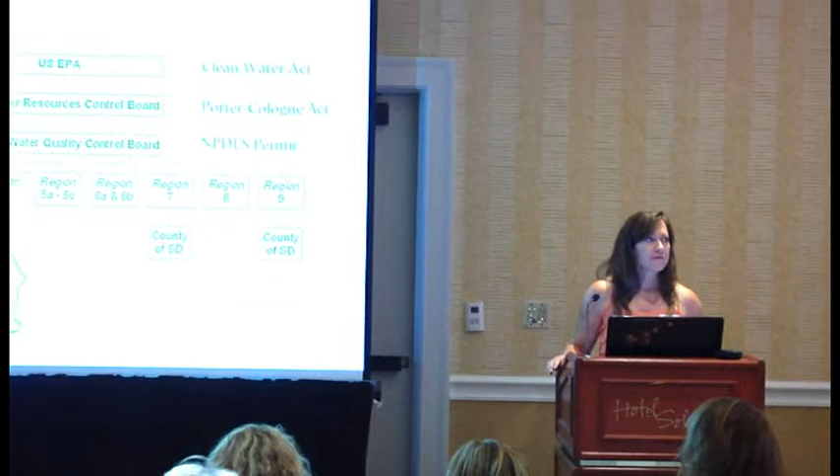From the regulatory side, it all starts at the federal level with the US EPA and the Clean Water Act. Section 402 of the Clean Water Act requires that permittees or co-permittees have a municipal NPDES permit, that's National Pollutant Discharge Elimination System permit.

Now, the Clean Water Act has been in force and effect since the early 70s, but the NPDES section has been in effect since 1987. That was a relatively new addition to control pollutants through stormwater and urban runoff.

We also have to have a new permit every 5 years, and that's why they're adopted on an iterative approach. One more interesting fact about Section 402 of the Clean Water Act: it does not allow for what we call backsliding. There's an anti-backsliding rule, meaning each iteration of the permit has to be at least as stringent as its predecessor. In fact, more often they become more stringent, as you will see with this new permit we're going to talk about today.

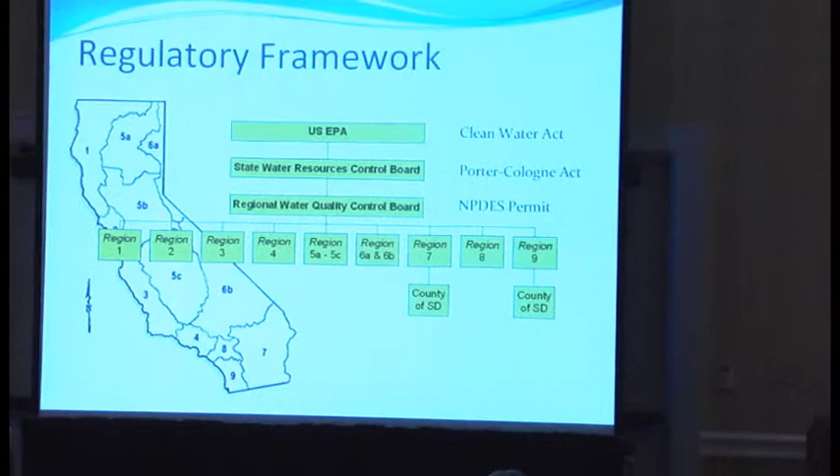Most states can implement their MS4 permit directly through the Clean Water Act. Other states, like California, have also promulgated their own act, the Porter-Cologne Water Quality Control Act, which the State Water Resources Control Board implements at a state level, including our basin plan, ocean plan, thermal plan, and other plans. So it's basically the Clean Water Act with a lot of additions specific to California.

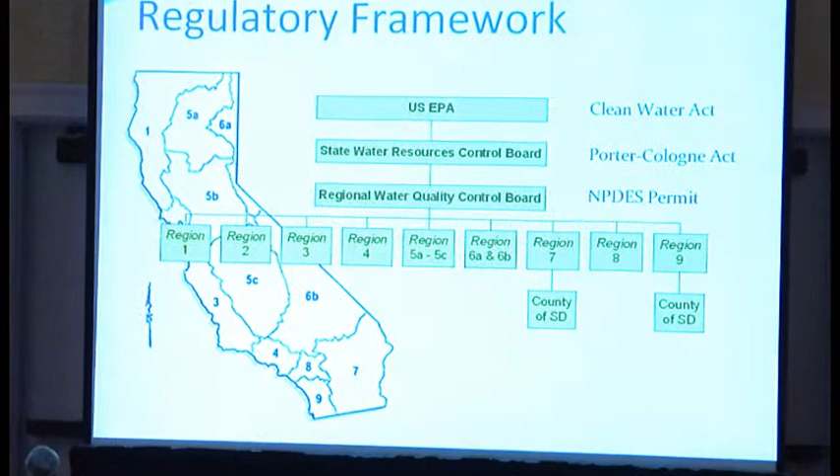At the Regional Water Quality Control Board level, or at the local level, you'll see from the map in front of you that California is broken up into 9 regions. San Diego County is unique in that we're actually split between 2 regions - Region 9 and Region 7 - and that dividing line is the Tecate Divide, where the mountain peaks are.

If you go east of the Tecate Divide, you're in Region 7. If you go west of the Tecate Divide, you're in Region 9. Region 9 also encompasses parts of Riverside County and Orange County, the south parts of them. They're co-permittees with us now in this new permit as part of Region 9 as well.

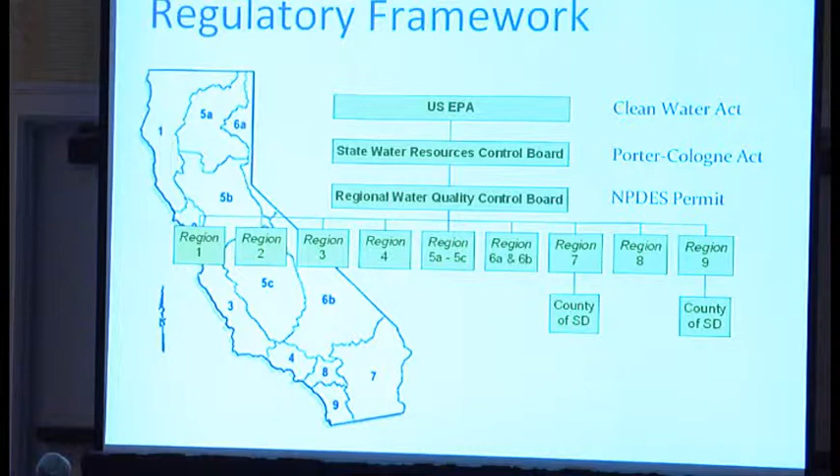And don't worry, there's not going to be a test on this later.

I just wanted to let you know that as you get down to the local level, such as with the County of San Diego, we have to implement the permit through our local codes, ordinances, and guidance and technical manuals. Fundamentally at the County of San Diego, and I'm sure other municipalities have similar ordinances, we have the Watershed Protection Ordinance, which is our first line of defense helping implement the permit and creating controls you'll see on development projects. We also have the landscape ordinance and the water efficient landscape design manual recently implemented to help with irrigation issues.

Our Standard Urban Stormwater Mitigation Plan is the development Bible, if you will. It currently contains low impact development and hydromodification controls, and development controls subject to stormwater management plans. Also our LID, or Low Impact Development Handbook and fact sheets. On a peripheral sense, development projects subject to the Resource Protection Ordinance, the Multiple Species Conservation Program, and the Biological Mitigation Ordinance can also have water-related features peripherally addressed. Again, you just need to understand that we implement these permits at a local level through these mechanisms or vehicles.

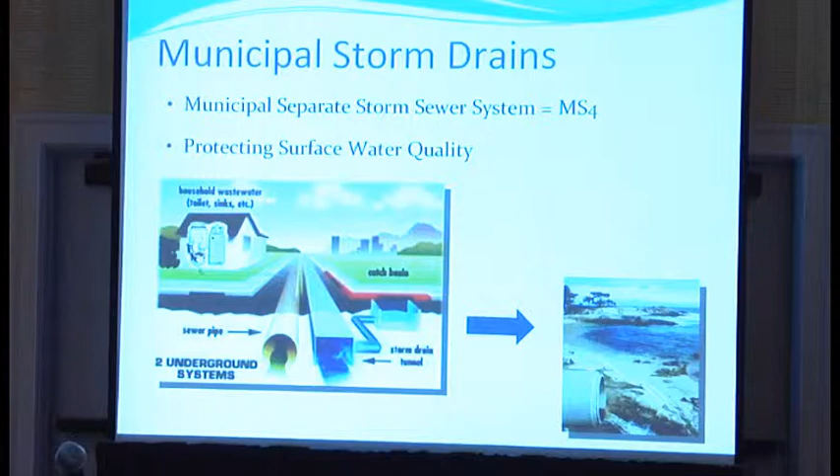So when we're talking about what we're trying to control and enforce with this permit, we're talking about the municipal storm drain system. As owners and operators of municipal storm drain systems, what we call the MS4, the Municipal Separate Storm Sewer System, we have to make sure that anything conveyed through those systems doesn't cause a problem to receiving water. That's how municipalities protect surface water quality, by making sure that anything that goes into our storm drains goes in clean and comes out clean.

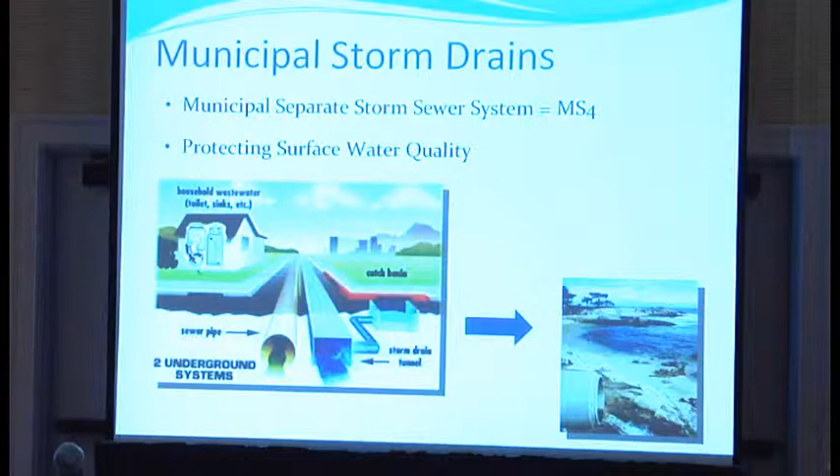That can be quite a challenge, because sometimes these systems are not closed systems. We're not just talking about a storm drain. Sometimes we're talking about culverts under roads, sometimes open channels, open systems, open flood control systems. So aerial deposition could affect that.

Someone asked me earlier whether our storm drains are separate from our sewer system, and that is in fact true in San Diego County. Predominantly we have, and that's why it's called an MS4, a Municipal Separate Storm Sewer System. Storm drains and sewer systems are not connected, so anything that conveys through there ends up in the receiving waters, and if it has pollutants in it, that also impacts the receiving waters.

Now there are some areas where we've implemented low flow diversion. Those are primarily near the coast, and they act like a last line of defense, taking storm drain waters off into the sanitary sewer system to a certain capacity. That's to mitigate flows into the ocean so we don't have a pollution problem there.

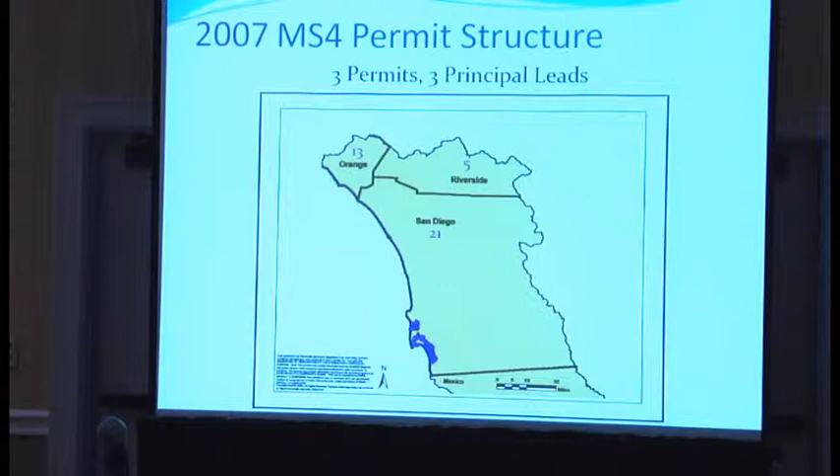That does create a problem for our regional board, because at any given time they've got permits in the cycle at varying different degrees and in different processes.

This is our new MS4 permit structure. We're all going to be under one MS4 permit, a regional permit throughout the entire MS4 drainage system region. What that means is that since we have 10 watershed management areas, we're now going to have 10 unique leads instead of 3 different leads for each permit, for the entire permit.

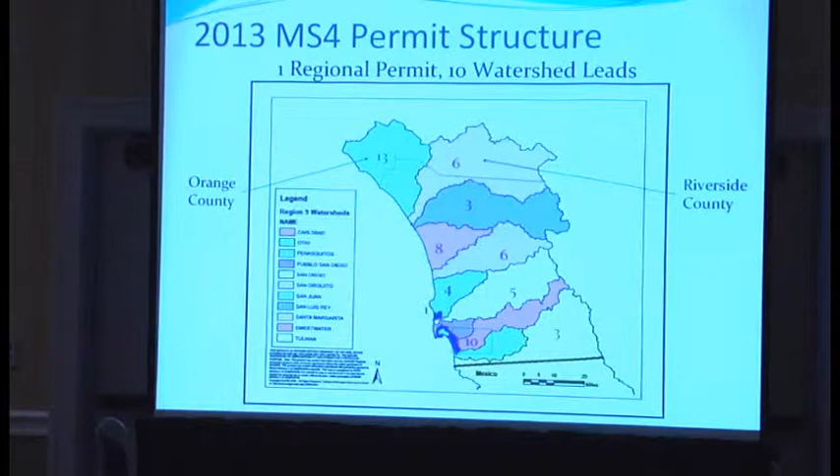Now, as you can imagine, each of these different colored areas represents a different drainage basin. The aqua up there starts with San Juan. The next one over, with the number 6 in it, represents the Santa Margarita. As you travel southward, you're into San Luis Rey, Carlsbad Watershed, San Dieguito, Los Penasquitos, San Diego River, the best watershed in the county.

That's my watershed. The San Diego Bay watershed is actually made up of 3 distinct drainages: the Pueblo watershed, which is what we're standing in right now, the Sweetwater River watershed, and the Otay watershed. Since they all drain to the bay, those were lumped together by the regional board to make it easier to manage those watersheds, because they're all draining to the same area.

And finally, the Tijuana River watershed, which has its own unique challenges because there's a binational committee that has to work on some of the flows that come in from Tijuana. What you don't see on this map is how large the Tijuana River watershed really is. It goes pretty far down into Mexico, and drains out into Imperial Beach. Some of you have read in the newspaper about issues we have with raw sewage coming across, and that's a big problem we're trying to work with too.

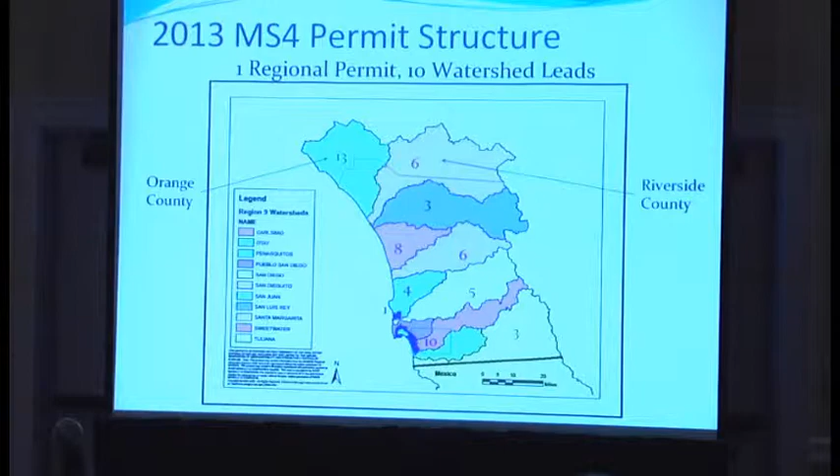So as far as leads, as I was saying before, each of these will have a distinct lead, and each will have a plan developed for them, which we're going to go into in more detail next. The little number in each of the watersheds represents the number of co-permittees that will be a party to water quality improvement plan development and a party to participating in those watershed management areas.

Currently, in our current structure, what we have is called a Watershed Urban Runoff Management Program. That's in our 2007 permit. The Watershed Urban Runoff Management Program is, I guess you could call it, prescriptive - very activity-based. We know that we have issues in our watersheds, and we know pretty much from years of monitoring and TMDLs that we've had adopted recently what type of issues we have in each watershed. Because our WURMPs, our Watershed Urban Runoff Management Plans, had to be activity-based, basically what we did is put into effect activities to mitigate those problems.

I'll give you an example. In San Diego River, we know that bacteria is a huge issue, and the markers that we test for are fecal indicator bacteria, Enterococci, things like that. Knowing that pet waste was one of the problems we were having, we put together pet waste management programs, which consisted of a series of different surveys. The city conducted surveys, the county conducted surveys, and then we handed out pet waste dispensers and bags to pet owners at different events to encourage them to pick up after their pet each and every time.

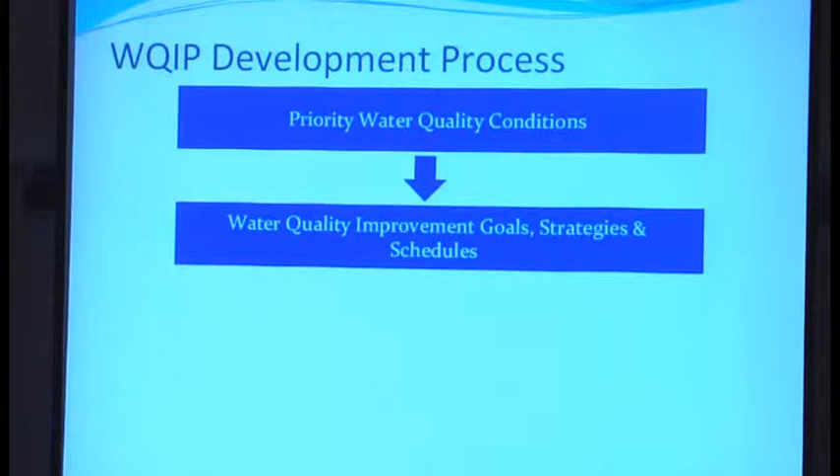That means that we're going to be looking at some numeric goals, and that could be a parts per million numeric goal, or that could be a numeric goal that says something like, we'd like to address over-irrigation and reduce over-irrigation in this watershed by 10% in the next 3 years. That could also be the type of numeric goal that we may see in this next permit as we develop our water quality improvement plans.

Finally, we have to be able to assess ourselves. We have to not only be able to assess the individual projects that we put together, but the program as a whole, to make sure that the program is coming together and is working properly, and make sure that the programs we're putting into place are working and that we're getting results. In order to do that, we're putting together a monitoring and assessment program to assess that.

Finally, another big component of the permit is to implement what's called adaptive management, or we call it the iterative approach and adaptive management process. What that means is we're not only, through our monitoring and assessment program, assessing our program, but we have a process put in place that will allow us to go back to the beginning if we reach some of these goals and reassess.

Now that we've reached, let's say, the bacteria goal, because every pet owner in the watershed is picking up after their pet, and we've achieved that goal, what's next on the list and what can we do next that will be beneficial to this watershed so that we can ultimately reach those basin plan standards and objectives.

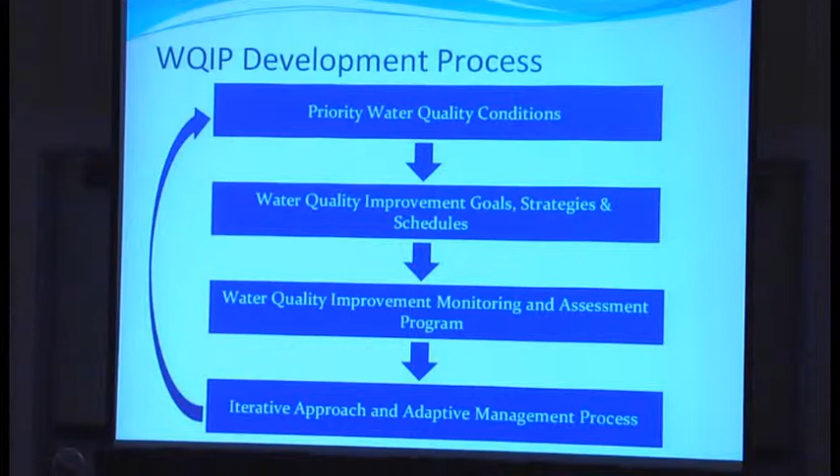One of the interesting things in this permit is the alternative watershed management area analysis, which is an optional process for water quality improvement planning.

This links directly with alternative compliance. In our permit, we're required to make sure BMPs and controls are done on site. But we realize not every site can take or withstand all the best management practices, so there needs to be an option for off-site mitigation or other opportunities to reach water quality objectives and goals. That's where alternative compliance comes in.

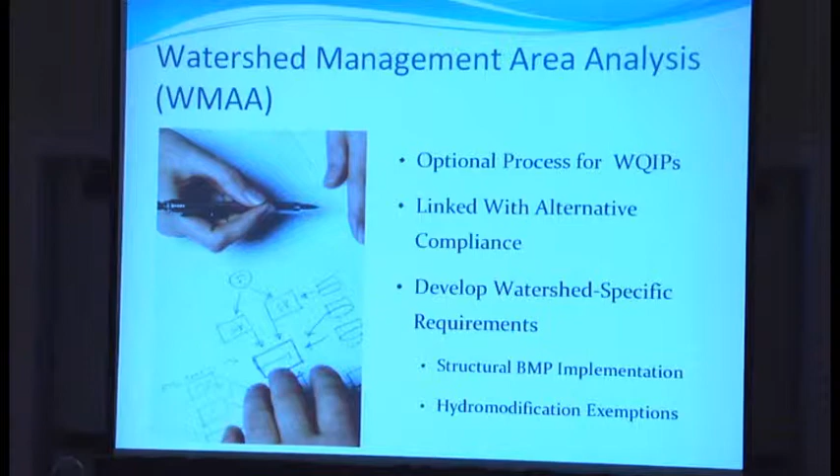The area analysis will allow us to look at the watershed and find off-site solutions for implementing water quality controls, and will also allow us to bring back some of the hydromodification exemptions that were taken out of the new permit but exist in our current permit. We'll get to hydromodification in more detail in a minute.

The benefit of doing this area analysis is that you can come up with candidate projects for off-site mitigation or the alternative compliance process. Some of the off-site projects we're looking at include restoration and rehabilitation of streams, retrofitting infrastructure to retain or infiltrate water, groundwater recharge and augmenting water supply, and helping preserve floodplains.

Now, the new development regulations have changed quite a bit and are more stringent. I'll go right into these quickly - this is basically what's changed from our current permit to our new permit.

In Development Planning Section 3 of the new permit, there's a change to the priority development project categories. Is everybody familiar with a priority development project and what that means? I see no hands raised, I see a lot of heads shaking. Priority development project is a concept that's in our current permit.

Basically, if you meet certain criteria - if you're a developer coming in to develop a commercial or industrial site that's at least 1 acre in size - you're considered a priority development project and subject to the controls of the major stormwater management plans. There are certain controls you have to put in place.

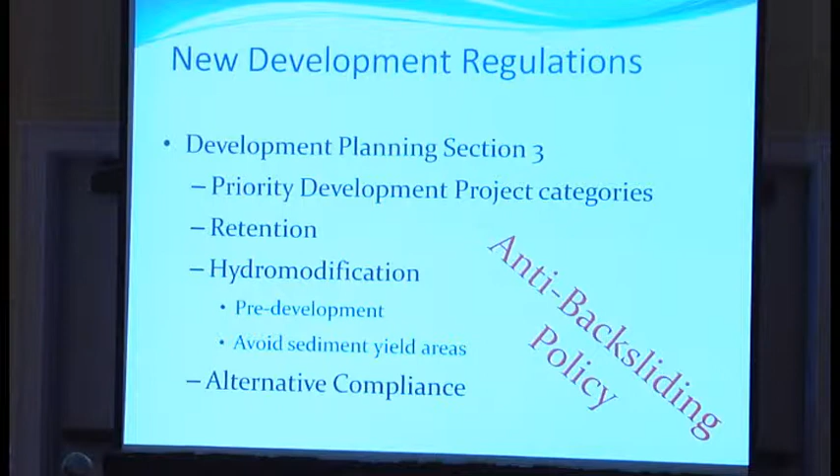So I mentioned the priority development projects. Like I said before, under the 2007 MS4 permit, if you were a residential development developing 10 dwelling units or more, you were considered a priority development project, and you had to implement low impact development on site. If you were a commercial or industrial site developing 1 acre or greater in size, you had to implement low impact development on site.

Now the rules have changed. If you're developing a commercial, residential, or industrial site, now we're into 10,000 square feet of impervious surface, which, as you realize, can add up quite quickly. You could have ten 1,000 square foot homes, and now you're a priority development project. And most homes that are built today are not 1,000 square foot homes. I think we know that.

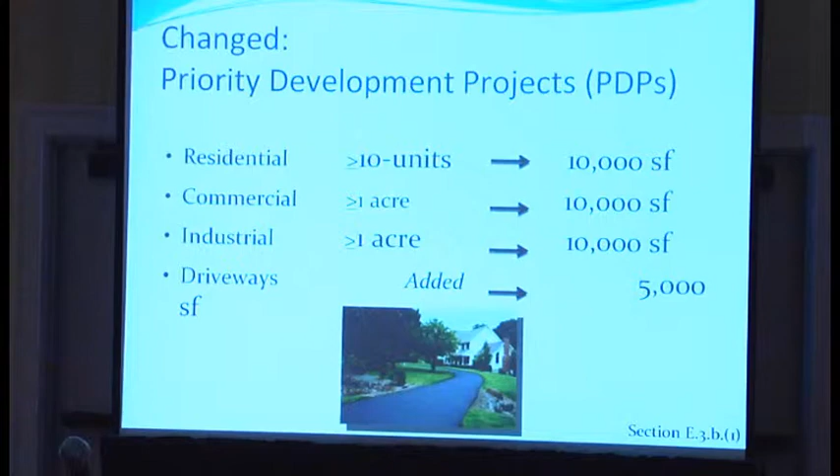Also, residential driveways, which were previously exempted in our 2007 permit, are now added in this permit. So if you add a driveway that adds up to 5,000 square feet or greater, that's going to kick you into the priority development project category, and you'll have to implement additional controls. Now, there is one caveat with this section: if you use permeable pavement, that permeable pavement will not count towards your impervious calculation. So you get a little bit of a break there if you use permeable pavements to design driveways or some of the hardscape in the project.

The reason why priority development projects in this permit are going to be an issue for future developments is because now we don't just implement low impact development. Now we have to actually implement 4 types of controls. We have to implement source control BMPs to mitigate at the source, and those can be as innocuous as storm drain stenciling, or if it's a commercial site, making sure they cover up the equipment so that materials don't leach out during a storm event. You have to implement treatment control best management practices. You have to implement low impact development to retain the 85th percent storm event in a 24-hour period. And you have to implement hydromodification controls all on site if you're a priority development project.

So that's why priority development projects are so important to understand. The 4 types of controls: there's source control BMPs and treatment control BMPs, low impact development, and hydromodification.

There will be a test on that later. No. But wait, there's more good news. What if it's a single residential, but the driveway is more than 5,000 square feet? Then you're going to be classified as a priority development project unless you use some sort of permeable pavers, and that permeable paver won't factor into your calculation.

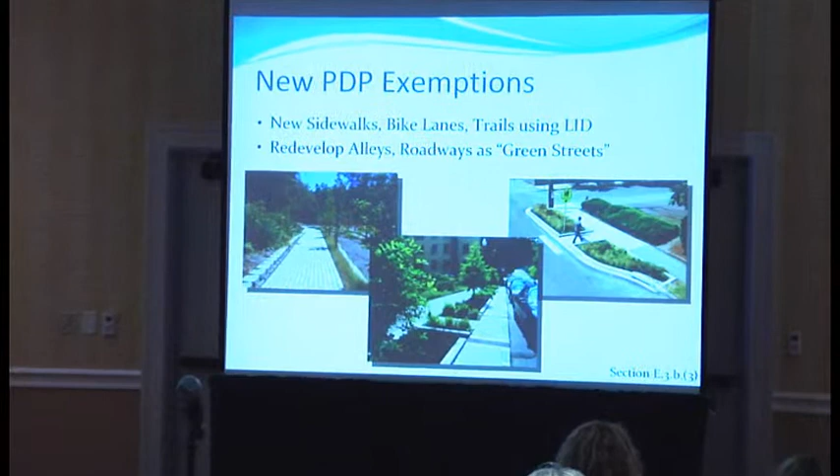There are some exemptions, though, and that's what I'm going to get to. If you're developing projects such as sidewalks, bike lanes, trails, and you use low-impact development with either biological filtration or permeable pavers in the hardscape areas, those would be exempted. Every project that comes into the municipality to ask for a permit is going to have to implement, at the very minimum, source control and LID. It's those projects that are priority development projects that have to implement all 4 controls, unless they're using one of these exemptions. So if you're developing sidewalks, bike lanes, and trails and use a permeable material—permeable concrete, permeable asphalt, permeable pavers, DG, that type of thing—those would offer you an exemption. And so you would only have to implement the 2 controls, not all 4.

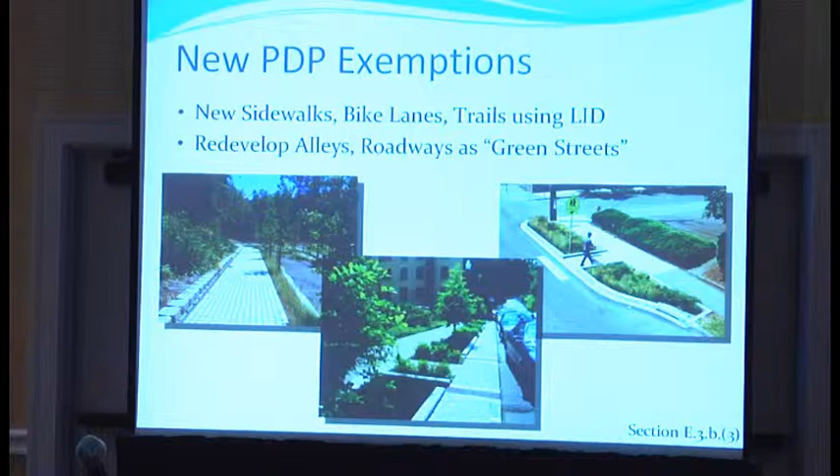The other thing is the permit is really pushing the US EPA Green Streets program, which as a planner I tend to like. Some of the pictures up here, the one in the center, is actually from the US EPA Green Street site. Being able to use biofiltration, holding cells, swales, permeable pavements, planted areas, reduced lane widths, and multimodal transportation will also offer you that type of exemption. So we're going to be encouraging projects to implement US EPA Green Streets and to use LID on their trail systems and bike lanes whenever feasible, so they can be offered these exemptions in their projects. Now this is the new retention standard.

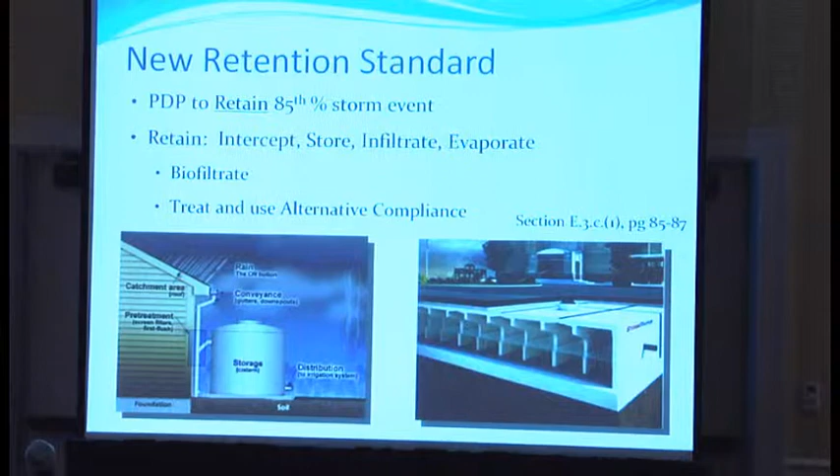This is probably going to be the biggest thing for anybody in the landscape business to date. Fundamentally, if you're looking at a site as it comes into the municipality, they're going to be asking you first and foremost to retain all storm events and to retain all runoff on site. That means no over irrigation, no overspray. If there's a rain event, you have to be able to design your best management practices to contain the 85th percentile storm event in a 24-hour period.

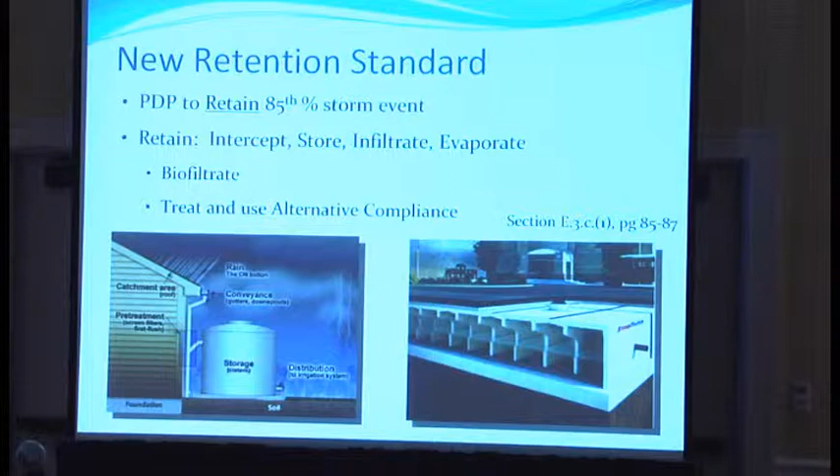Generally speaking, in San Diego County we have 7 to 10 inches of rain annually, so you're talking about the first flush, or about the first 1 inch. Depending upon the isopluvial map, it could be a little bit different in different parts of the county, but that's what you have to design your best management practices to.

If you can't intercept it, store it, infiltrate it, or evapotranspirate it, there are options for biofiltration and for treatment and use if you use the alternative compliance.

One thing I don't think I told you, if you look on your handout, you'll see these different sections. Those are sections in the permit where this language can be found. As you go through the presentation and the handout, look at the pages and the different sections there. Most of this comes from the development section, section E, past the jurisdictional section, but in the development section. You can go back and see the actual language, which is very technical and very stringent to listen to.

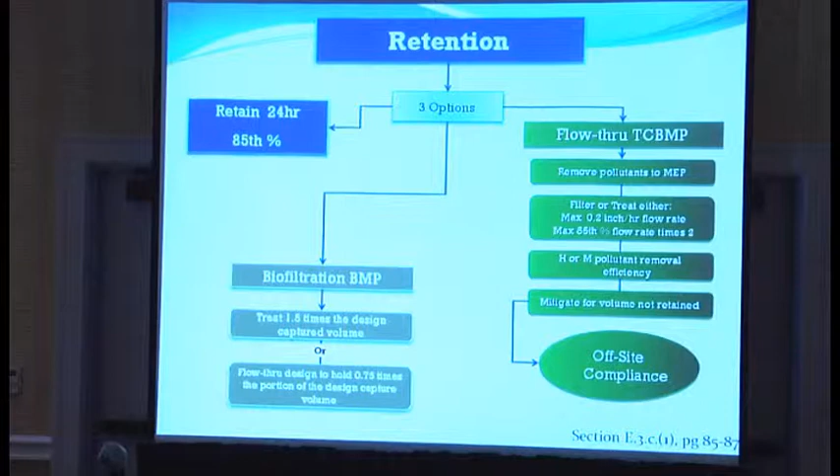So the chart that I have here is really giving you a little more detail about the options that you have. First and foremost, the permit is going to require you to retain that 24-hour storm event on site, period.

But if you can't retain, you can use the biofiltration option, BMPs, but they have to be sized appropriately. If you're using biofiltration, it has to be sized to treat 1.5 times the design capture volume not retained on site. And if you're using a flow-through device, it has to be sized at 3/4, or 0.75 times, the portion of design capture not retained on site.

Finally, if the municipality has done the off-site compliance or this alternative area analysis, you could use off-site flow-through treatment control BMPs. They have to be designed to remove pollutants to the maximum extent practicable, the MEP standard. And these have to be sized to the criteria you see here on the screen too. The H or M pollutant removal is high or medium pollutant removal efficiency. You also have to mitigate for the volume you did not retain on site at an off-site compliance site.

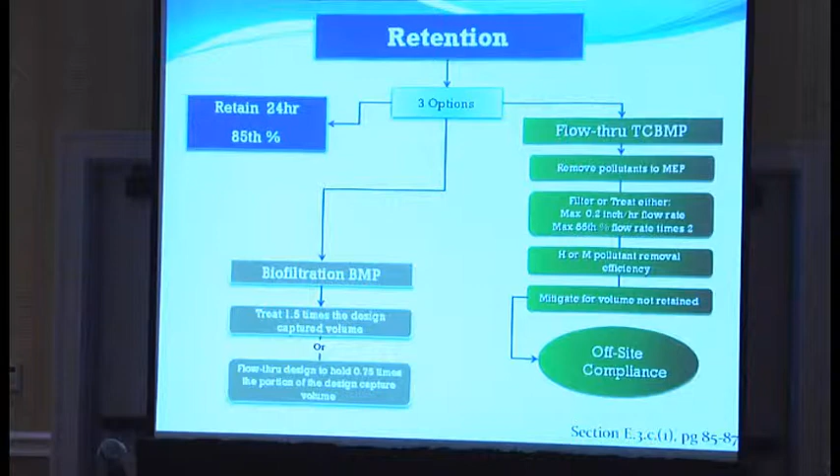I know it gets a little bit technical, and probably as the landscaping industry, you're probably not going to have to worry about off-site compliance as much, but there are 3 options to work with this new retention requirement. One thing that I wanted to bring up, though, and I think a lot of people in this industry will do, is you're probably going to design ponds, right?

How many people out there design ponds as part of a landscaping, or water features as part of landscaping? There's probably a number of you that will do that. And I understand that the new vogue in ponds is these saline or saltwater ponds. That's actually called out in our permit.

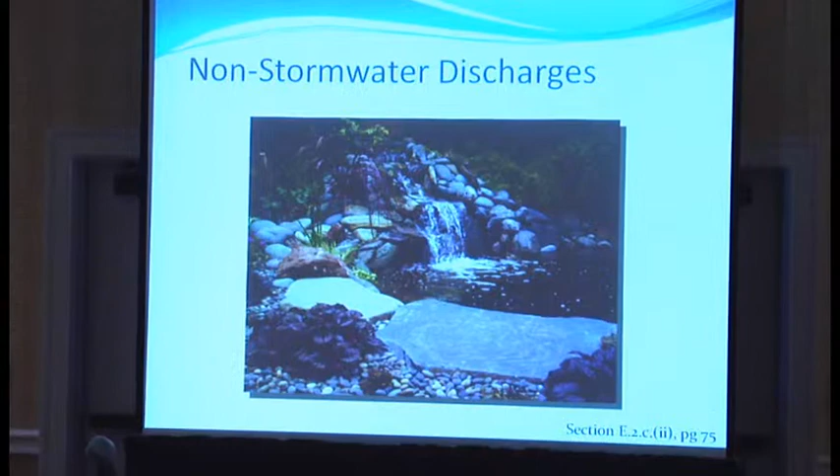It's problematic because you cannot discharge that when you're draining or maintaining these ponds to the storm drain. In fact, it falls under section E2C, where the chlorinated pools are called out. Just like with a chlorinated pool, you have to take all of the chlorine and all of the chemicals out before you can discharge that volume of water into the storm drain. These actually can't be conveyed to the storm drain.

They have to be conveyed to a landscape area, which I don't know about you, but I happen to know that salinity is not necessarily good for soils or plants. The other option that's called out in the permit with ponds is being able to flow it directly to the ocean or to another saline site via a conveyance pipe or a concrete line channel. So there are options to do it, but if you're going to be designing ponds, and with the new vogue in ponds being these saline ponds, make sure that maintenance is part of your design when you're thinking about these ponds, because there's going to be some criteria about where these ponds can be discharged in the future.

So hydromodification is a unique feature. Probably a lot of you don't know what hydromodification is. It's basically downstream impacts to streams that erode them away at a much faster rate as a result of upstream development that did not place the proper controls on stormwater or urban runoff. So you've got higher velocity and higher flow of water, and it's scouring and eroding away the natural channels at a rapid rate, damaging the environment.

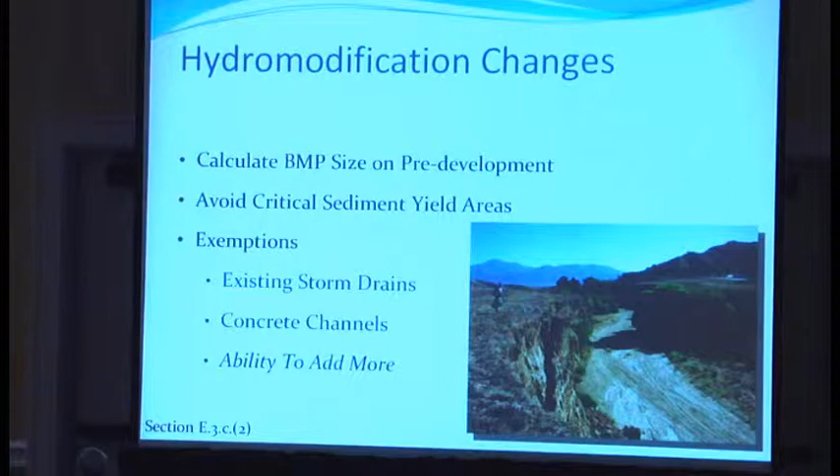But what they want us to do is take a look at the project site, whether it's a raw project site or a redevelopment site, and use the underlying soils as the basis for the calculation to size your best management practices. We also have to avoid critical sediment yield areas, which will be determined on a jurisdiction by jurisdiction basis.

A little bit more on alternative compliance if developed in the WQIP, or Water Quality Improvement Plan. I can't stress enough that this is an optional watershed management area analysis, and that's important because each municipality may not do this optional analysis. It's a higher level of analysis that we have to do in our planning process.

We have to look at mapping soils, all of the channels, whether natural or concrete lined. We have to look at slopes. We have to take a much more detailed look at our watersheds and existing infrastructure, where new development may go, our raw lands, and find out where we can introduce some of the hydromodification exemptions and where we might put off-site mitigation projects to mitigate some of the stormwater controls into receiving waters.

Because it's an added burden and an optional approach, some jurisdictions may not take advantage of this. And where that's challenging for engineers and landscape architects is: if you go to process a project, say at the County of San Diego, and they've done this level of research and analysis in the watershed, you may be able to process a project and find some off-site mitigation or exemptions for hydromodification.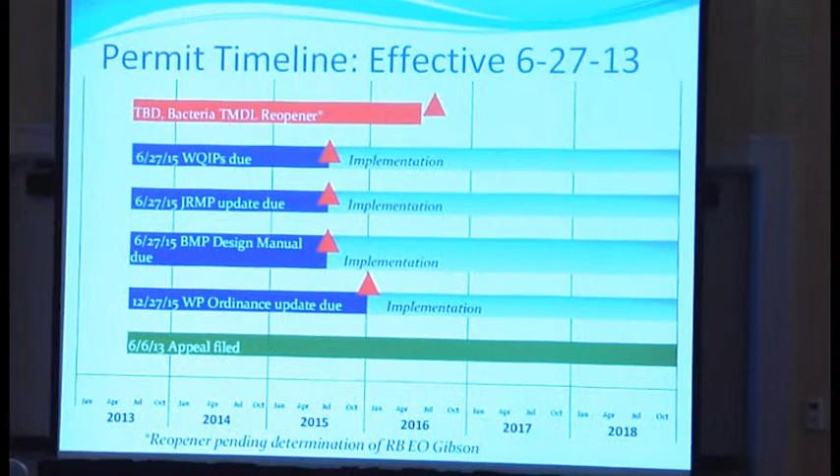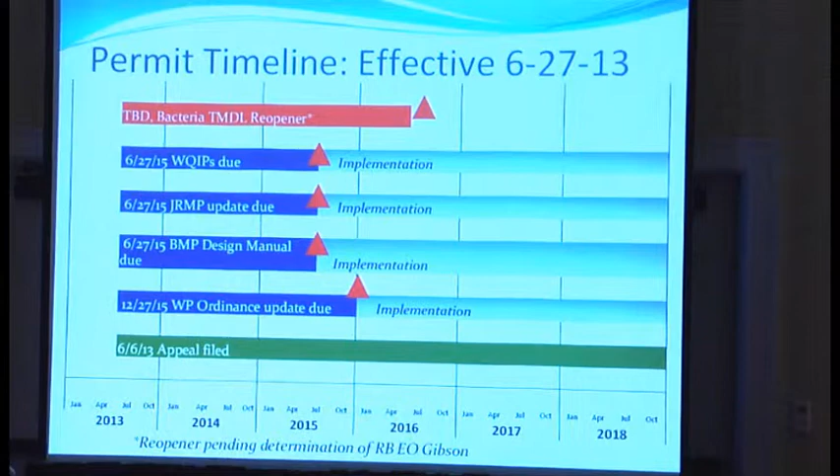So a little bit about our timeline, and I think this is important to understand too. Our permit was adopted, as I said before, on May 8th of this year, and per permit language, it comes into effect 50 days after the permit was adopted, which was effective on June 27th of this year. Now that doesn't mean that the regulations take effect June 27th at 8 a.m. What that means is the clock has started ticking for us municipalities to start developing all these work products and to ultimately update our codes and ordinances so that we can start implementing the new controls.

There are 3 things that are going to be done simultaneously. One is the water quality improvement plan that I've been talking a great deal about today. That is due as a final product to the regional board on June 27th of 2015. So we have to have, as I showed you before, there's an iterative approach—we have to have our water quality improvement plan, our goals, our strategies, programs, projects, all of that wrapped up in a neat bow and handed to the regional board by that date.

We also have to update what's called our jurisdictional runoff management program. It's kind of the backbone of our program. It basically talks about what the jurisdictions, on an individual jurisdiction by jurisdiction basis, are going to do to mitigate flows into other municipalities or other areas. And it contains things like how frequently we're going to sweep streets, or what types of educational and outreach programs our jurisdiction is going to offer—those things that are offered at a higher level.

But they also have to be engaged with and intertwined with the water quality improvement plans, so they have to kind of work together and be developed together as we move forward. That work product is also due at the same time.

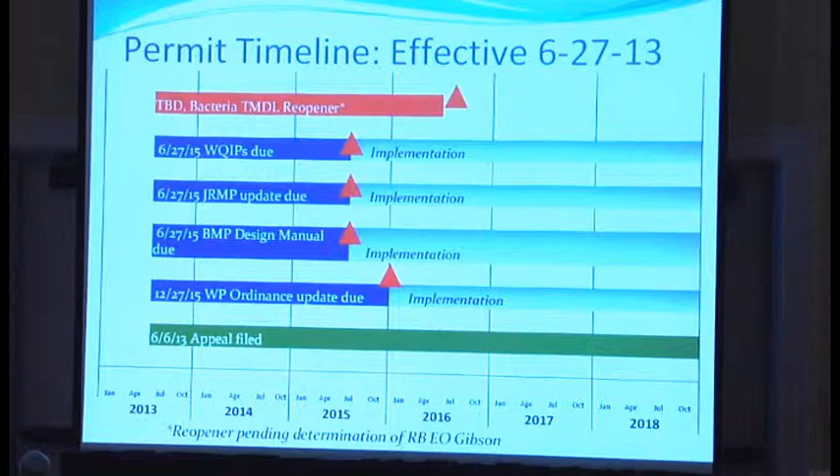Some of you may ask about grandfathering. At this point, we don't know. The way the permit is written, it talks about lawful prior approval for projects, and that December 27th date is the other known that we have. We're looking for county and city councils to opine on what grandfathering will really look like when you bring a project forward.

Now, I'm going to blow through the creative solutions because I think I have one minute. But today was all about creative solutions and what we can do. One of the things I wanted to talk about was a fun little project I'm involved in, along with several other partners, called the Sustainable Landscapes Program.

It's a Prop 84 Integrated Regional Water Management, or IRWM, grant project. It's a partnership with 8 public and private partners - the County of San Diego, the City of San Diego, the County Water Authority as our lead agency, Surfrider Foundation, the Association of Compost Producers, and the California Center for Sustainable Energy - all bringing forward good information and data, and technical tools like the counties' integrated pest management tip cards and low impact development guidelines and fact sheets.

The city's bringing forward a lot of incentive programs. Our purpose is to develop a set of integrated guidelines, integrated curriculum, and integrated technical assistance to create some of the best solutions for landscaping that will look at reducing potable water use, using rainwater as your first resource for water, mitigating pollutants, keeping things from flowing off-site, and creating healthy soils, so you create that sponge-like effect to hold water on site and avoid runoff issues.

You're most kind. Most people thought I worked for Converse—that was my first job, my first gig. Stephanie, I want you to know I have a couple confessions to make: I have never been, nor am I now, a backslider. And as I talk, y'all will realize I'm not from around here, and I do suffer from Midwest mentality, so I apologize.

How do you make this thing move forward? This way, okay. As design professionals, I'm assuming y'all are familiar with segmental pavement construction, design, or use. They could be concrete, clay, or granite—typically, the way the Romans built their roads, there's nothing tough about it. They're designed to shed water and to last over 50 years. That would be ideal in a perfect world, but sometimes they don't get built as well as they should, and sometimes they get built over poor soils that weren't accounted for, so they don't always work. Now, with an effort to improve it, what we want to do is put water back in the ground, back in the pavement.

That's a no-no. So I spent about 15 years learning about permeable pavement construction, and what I found is in the beginning I went to the internet and Googled porous pavement. I found that it was expensive to build, expensive to maintain, you couldn't drive heavy vehicles on it, and you couldn't use it in cold climates. Of course, in San Diego that's not a problem for you, but where I come from, it gets pretty cold.

Now, as I look at pervious pavement, porous pavement, and permeable pavement, those are all terms that get thrown about. What we want to talk about today is permeable pavement, because essentially all three products, or systems, are infiltration trench technology with some type of wearing course. Of course, we're in the business to make concrete pavers, so we want you to think about permeable pavement designed with a high PSI—they have long-term durability and are able to be maintained.

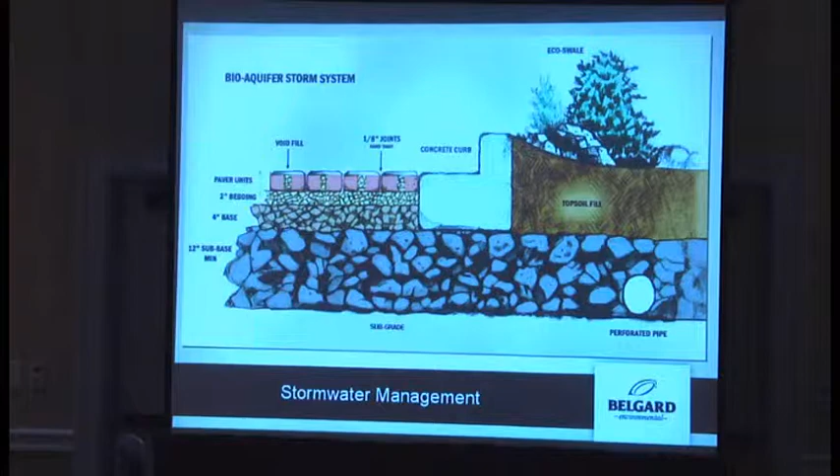One of the things Seth asked me to talk about for your group was water quality. In the beginning, when I looked at doing permeable pavement design and how you create a system of moving water through pavement without damaging soils, the questions were: can the water really go through the pavement? Once you capture it, what do you do with it, and where does it go? How can I clean it? Because that always seems to be the big thing. So with porous materials, typically clogging will occur and you can't clean it.

With permeable pavement, we find that we can extract it, but in today's talk, we're not going to really cover that. What I'd like to talk about is that we have high flow rates coming through the pavement surface, in excess of 150 inches an hour. Even if it clogs 90%, you'll probably still exceed your 100-year storm event, in San Diego for sure.

In the aggregates down below, we actually have large aggregates that can store water. Typically, in a 12-inch cross-section, we can store about a year's worth of water for you San Diegans. So we're not really worried about the stormwater qualifications or the rate and flow - that train has left the station.

One of the unique things about these products - if you look at the surface, typically you look at that surface as being a filter, and that's where the TSS, or total suspended solids removal, occurs. Typically that's going to be in the neighborhood of 60, 70%, up to 90%. We'll look at some reasons why.

Then the perception is that all these particulates and fines, as they migrate through the openings in the pavers, all that dirt goes to the bottom and you lose the storage capacity. But what we're going to talk about is how these particulates and fines attach themselves to the aggregate in their vertical path travel, and they actually never make it below the first 1.5 to 2 inches of the aggregate joints.

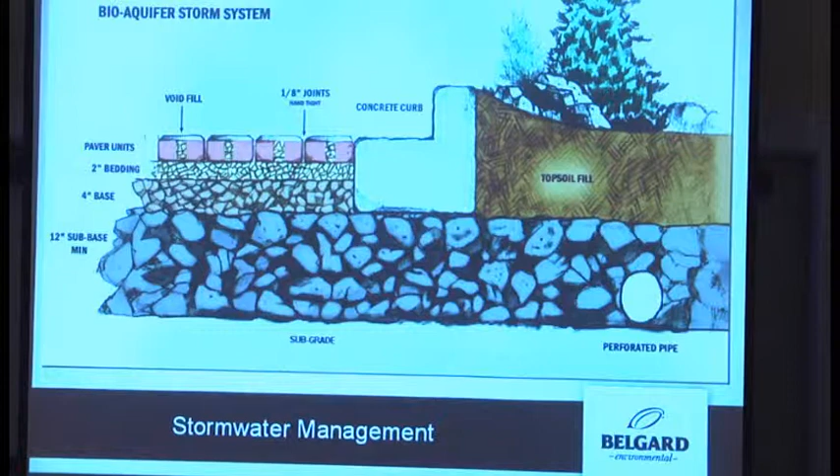The only thing that's left is these molecular or microscopic pollutants - phosphorus, nitrates, hydrocarbons, heavy metals, particles - things that are below the 50 micron level. So what do we do with those? There's not a lot known.

We've been studying permeable pavement, or porous pavement, or pervious pavement, for quite some time, and we can sure tell you how fast the water goes through, but there's not very much knowledge about how good the water is coming out the back end, that effluent discharge point. And for me, the battle is there.

The war is still getting rid of stormwater. What do you do with it? How do you treat it? How do you clean it? So we found some useful ways that we can actually capture and treat and provide detention storage, and promote groundwater recharge where possible. We also recommend using bioremediation as part of this process, and we'll take a look at how that works.

Typically there'd be three strategies. One would be full exfiltration. You have soils that are A or B soils - sandy, gravelly soils - that accept water infiltration rates greater than half an inch an hour. So we really look at capturing all the water, putting it right back in the ground.

But that's not a perfect world, because 80% of the projects I build end up being on clay soils. And I know we have all kinds of clay soils - we've got Georgia red clay, we've got Mississippi Yazoo, we've got California clays, expansive soils, Texas soils. But I've got to tell you, this system will work. It's just that you have to use different approaches.

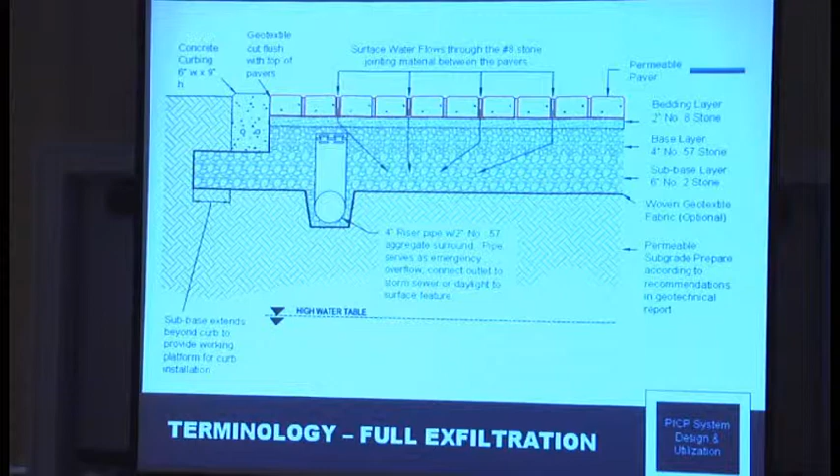So one of the approaches would be partial exfiltration. As I listened to Stephanie earlier, capturing that 85th percentile in your market, say 1 inch of rain, is like a no-brainer. We have a lot of studies we do in the Midwest, and Elmhurst College is one, where we captured water on the Elmhurst College site, and it took the first three-quarters of an inch of rain before there was any discharge from the site, which would be wonderful. It just coats the aggregates, it never comes out.

But a partial exfiltration is designed on C soils, or soils that have less than half an inch infiltration rate per hour, so you could have slower rates and still use this. But what we want to do is capture all the water, and then the water that's in excess of the first 85th percentile is allowed to discharge back into a daylight situation, or a storm sewer, or a river or stream. But the first flush pollutants have been captured and treated within this.

Now, there are some thoughts about creating sumps and holding the water in this area longer. Normally, we want to look at a 36 to 48 hour period of time, because we want denitrification to occur with time of concentration. That's a bad thing when you're building permeable pavements over clay soils - you don't want water to come in contact with the soils for a very long period of time.

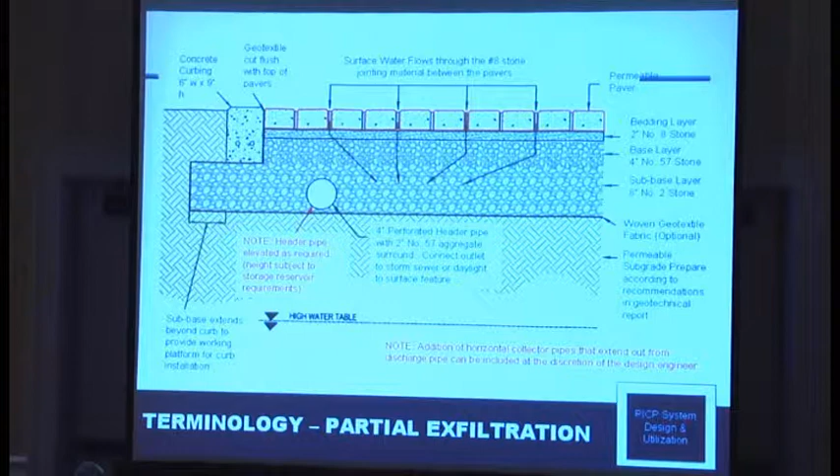So the next process would be: I've got brownfields, I've got fatty clay soils, they're expansive. We don't want water back in the soil, so what do we do?

So we use a no exfiltration system. What we're going to do is capture all the water and discharge all the water, not allowing any of it to go back into the soils. And you have a choice at that point: you can treat it totally to meet the water quality requirements for the municipality you're in, or you can use it and recycle it.

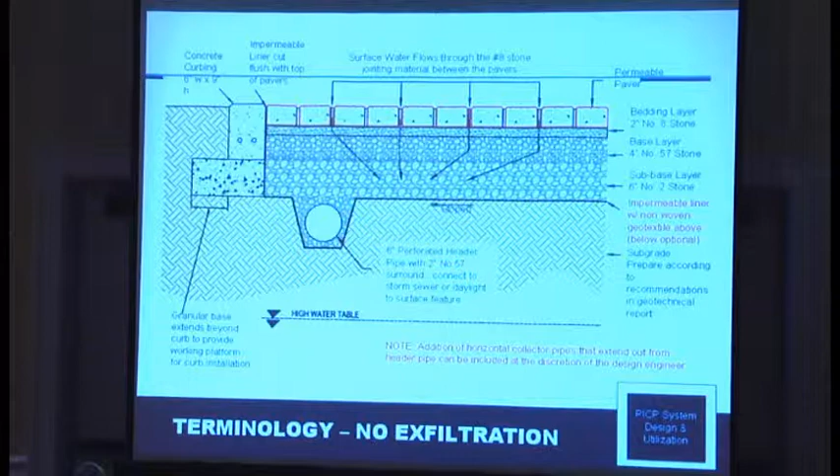In some areas in Europe, they're actually using this water in the aggregates and putting it in closed-loop geothermal heating systems. They're heating and cooling their homes with this water, so it becomes an energy source rather than a nuisance. But once again, that's not about water quality.

Now, what we did with Texas in Region 10, for TCEQ, because they have expansive clay soils, not unsimilar to what you'd find here in California, they gave us an 89% TSS removal rate, and all we're looking at is the first 9 inches of the system. So you have the paver, the setting bed, a layer of 57s, you put in a liner, and they use lime stabilization in their soils. So we're using conventional construction methodology to build roadways, but using the first 9 inches as a filter to capture and treat the stormwater.

So that would be a good strategy for any pavement. Quite frankly, if I'd have done this 20 years ago, I wouldn't be here today, because this is such a simple thing to do. It's the right thing to do when you're doing pavement. So if you had the option to make it pervious or impervious, to me it's a very simple choice: capture the water and do something with it.

Now, typically, I've been coming to California for several years, and when I first came here, we talked to municipalities. I talked to them about LID, and they had that deer-in-the-headlights look, like, I got to give up my grass? No, I'm not going to do that.

But in the Midwest or in the East, we use low-impact design or development, whichever you prefer to call it. Typically, I look at a treatment train process, so for me to use permeable pavement for capturing the first flush pollutants, using bioremediation for final treatment, it's like a slam dunk. It doesn't take a lot of thought process for that. Most regulatory agencies would certainly give you water quality credit for this process.

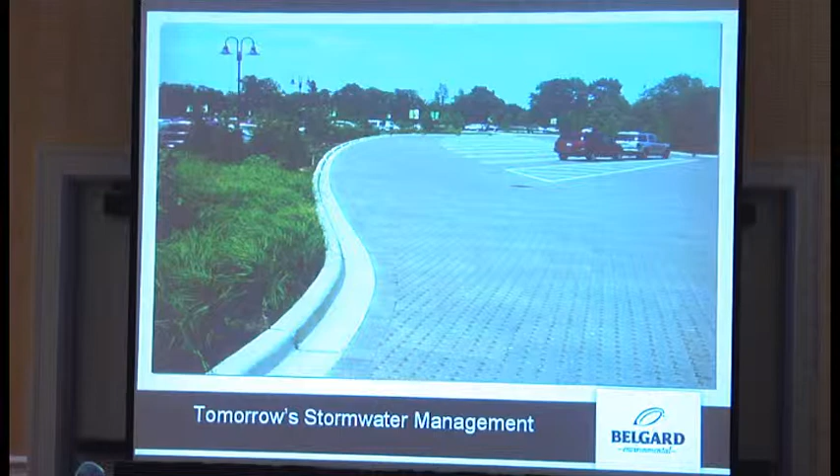Being landscape design professionals, you like to see the bioswales, I'm sure, but as a hardscape specialist, I must tell you, I don't need the bioswales to make this happen. But quite frankly, this is a standard operating procedure for us to build permeable pavement systems with bioremediation.

Now, the irony is on this site, it's been in place for about 12 years now. It was designed by an engineer, I call it... I forget, it doesn't stick to you. They don't want any responsibility. Teflon, I'm sorry, it's Teflon engineering. I apologize, I'm an old guy. See, I get lost, I'm sorry.

But they designed it to fail because they weren't sure it would work. So they made it so that if it failed, they would put asphalt over the surface. You notice the cuts in the curb line. Then they would send the water to the bioswales where it would fund the growth of the vegetation there. Well, after the first couple of years, it worked so well that they had to come back and irrigate the bioswales, because none of the water made it there. And of course, about the third year, the engineer's going, dang, that's a good job I did. I sure like that.

John, you want to talk now? Talk about Encore? Yeah, I guess. You guys hear me okay?

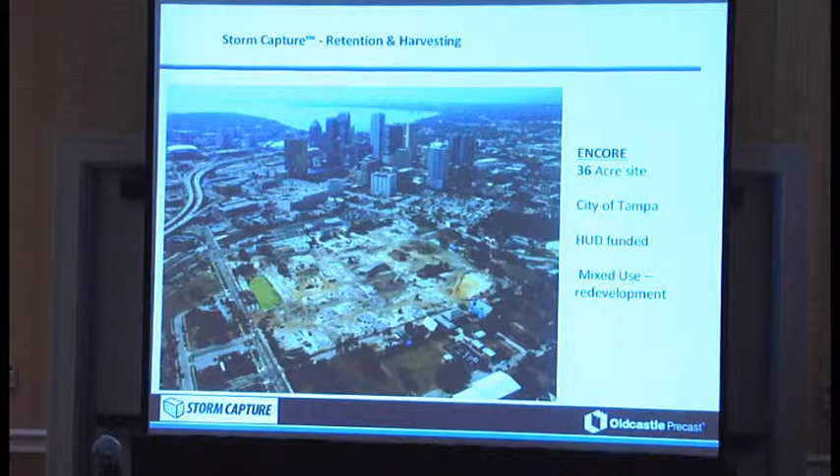So this project here that we looked at, we worked with a developer in Florida, a housing and urban development project for the city of Tampa. Essentially it was a 36-acre site for multi-use housing, a mixed-use development project. And they wanted to retain and harvest their water.

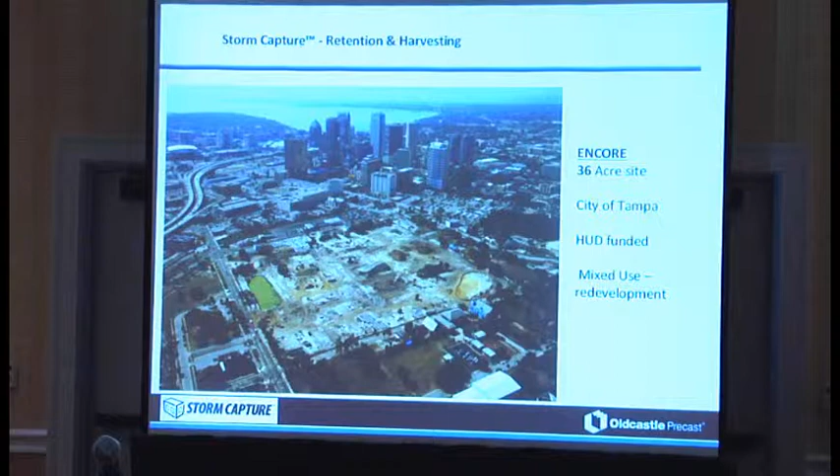So they called us, and we talked to them over several months' time about pre-treating the water in the system and retaining it. Sand filtration seemed to be the best way to go since it's a practical use. In this particular project, there are storm capture modules placed for retention.

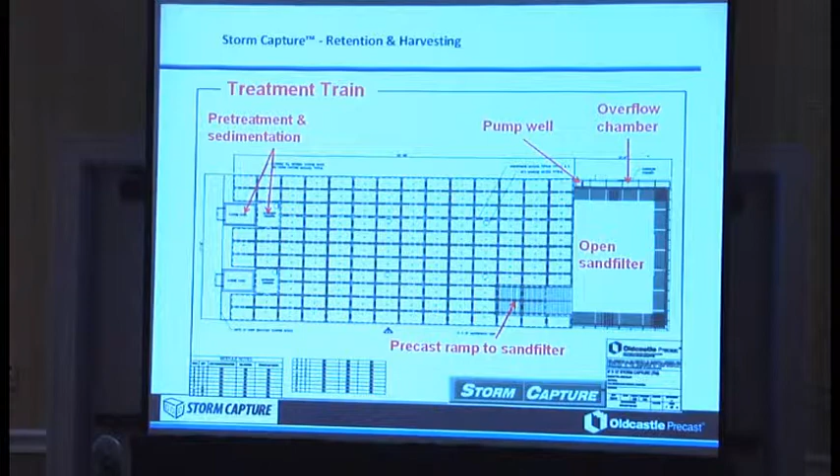We pre-treated them with nutrient separating baffle boxes, capturing the first flush, sand filtration for water quality, and then up there at the top right, you'll see the overflow chamber with the pump well where it pumped the water back into the system. What it allowed the Encore to do was it actually saved them about 7 acres of their site. They're on a 36-acre site, and they were able to utilize that 7 acres for development rather than for water quality issues.

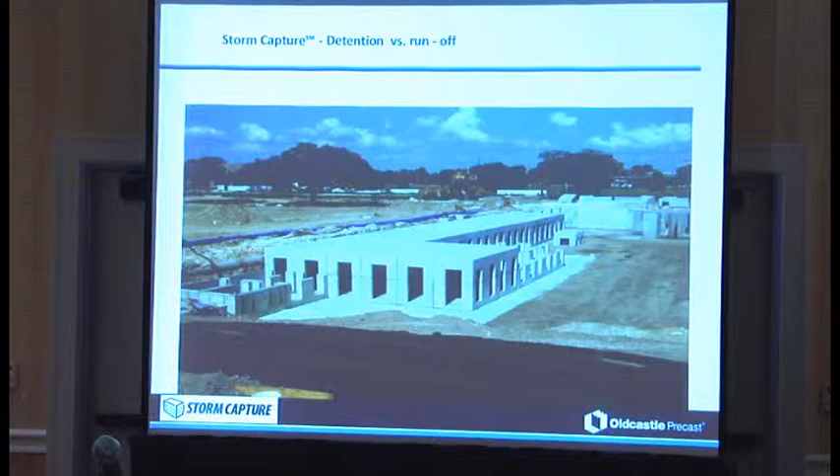So this particular site, they wanted to put a park in there, and with the park it had permeable pavers running through the pathways, with green landscaping around the areas. The photovoltaic solar system was placed over the top of the sand filtration system, which provided power for the lighting in the park. The water was reused for irrigation on the site. It was really a unique system, and they were very happy with it. It took up about 3 acres of their site rather than the 7 they were going to have to use, which opened it up for other development.

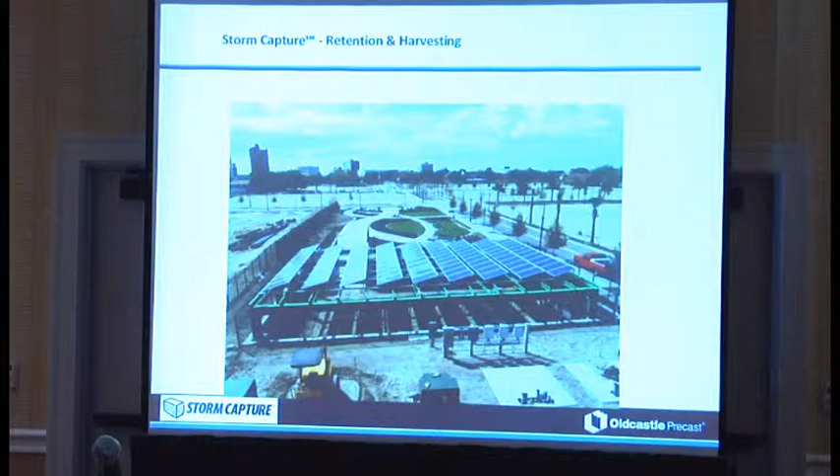We have a link to the YouTube video on this. It's a very exciting video for us to watch, a project I've been involved with for a couple of years, and how this is going to be an integral part of downtown Tampa.

When I first came into Oldcastle a couple years ago, there was the old precast group that John's with, and they had storm capture, and we had the pavers. I said, it would be nice, because I can't use permeable pavers where I have high water tables, and I can't use them where I have a lack of aggregates. Maybe there's a more cost-efficient way of dealing with this. So we took a look at how the permeable pavers worked, then we looked at storm capture, which was a concrete underground tank storage, and how it performs. I said, why don't we look at making a hybrid where we could have underground storage and pavement on top with a high TSS removal rate, maybe saving some cost efficiencies.

But once again, we're going to look at a full exfiltration strategy where the water goes back into the soils. That's kind of a no-brainer, but what you end up with is partial exfiltration, or if you have no exfiltration, the soils are so poorly absorbed you can't put water back in. So what we need is the ability to take this water, store it, treat it, and recycle it for water harvesting. It may not be a strategy used in San Diego, but I know Los Angeles is very intense right now about using water harvesting.

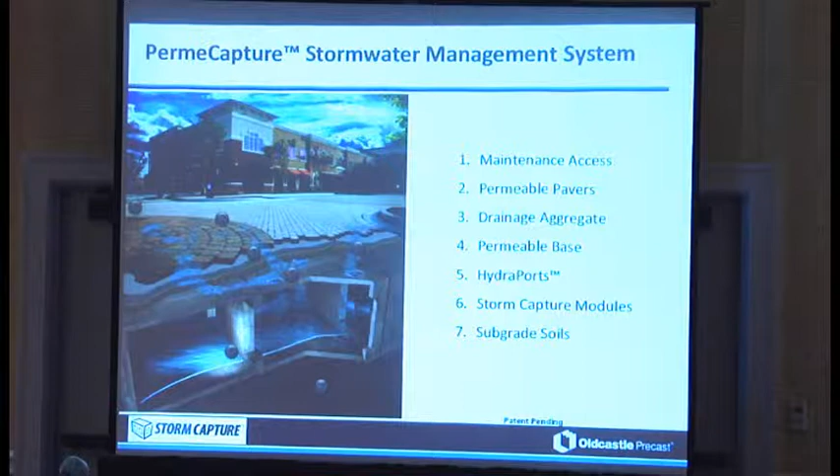But more importantly for me, it was how do we look at capturing the first flush pollutants, how do we treat the water so it can be sent back to the streams and lakes in a clean manner, and make it so we can fish and swim in our rivers once again. So I think this system probably will answer that process very, very well.

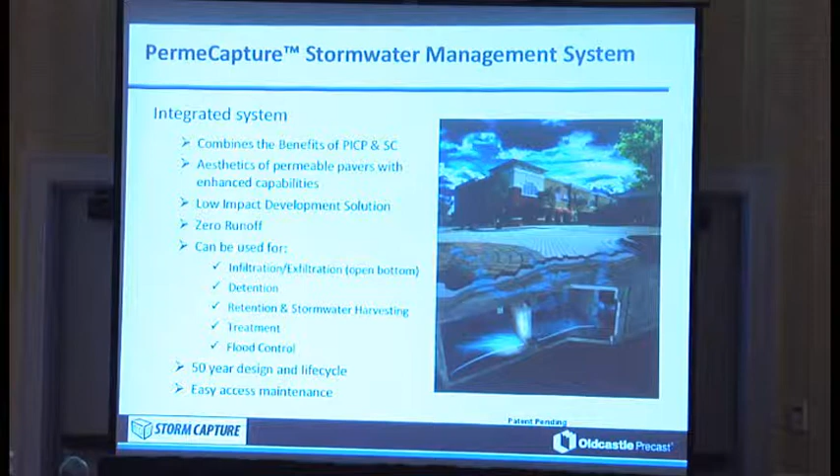So it becomes an underground system where it doesn't take up any land for the developer, and you don't have any surface retention requirements required. You can utilize 100% of your land to build a larger footprint of the building, increase your parking area, or improve your landscape process.

We also worked with Florida Gulf Coast University, the Flying Eagles, for those of you in the basketball arena - they were in the Sweet 16 this year. It just so happened we worked with Dr. Kim.

Oh, well, I'm in for it now. I'm going to start - well, you guys can all get even with me tonight upstairs. There's not a problem, throw me off the deck.

Is it really? I've fallen farther. About 50 floors. Oh, after the first floor it doesn't really matter.

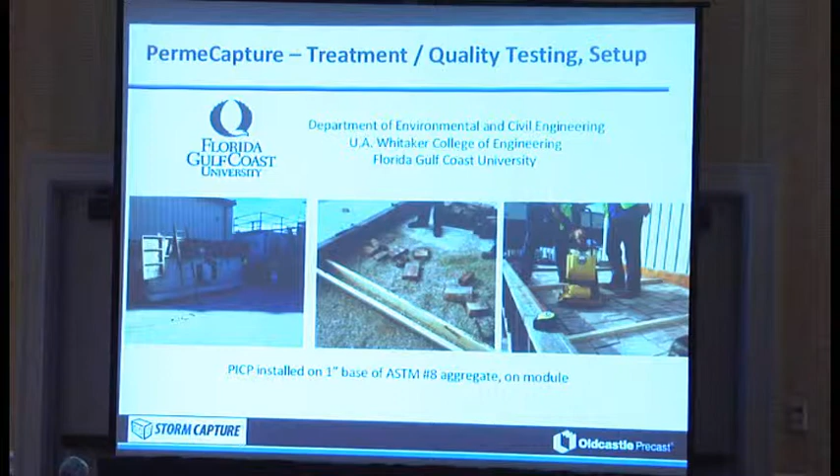So we worked with Dr. Kim at our Florida plant to look at what the TSS removal rate is. Does aggregate size have an impact? Does sedimentation matter? What kind of sediments are we looking at for pollutants, and how can we look at the removal rate?

So what we're looking at are pavers set over a setting bed over a concrete tank unit. We're using some New Jersey DEP particles, and for the aggregates between the pavers we're using either ASTM number 8s, number 89s, number 9s, or number 10s.

So what we find typically is the water does not go through the pavers - that would be the first perception. All the water moves through these joints, and the aggregates collect and attach the sediment to that.

And I wanted to see what happens after a 20-year period of time, because typically I've been forecasting that the maintenance cycle would be about every 15 to 20 years.

So some people have a perception that you have to extract the sediment every year, and sweep the surface to remove dirt and debris with a mechanical sweeper. But you don't have to use a vacuum sweeper, and you don't have to put chips back in the joints. That's a very low maintenance item.

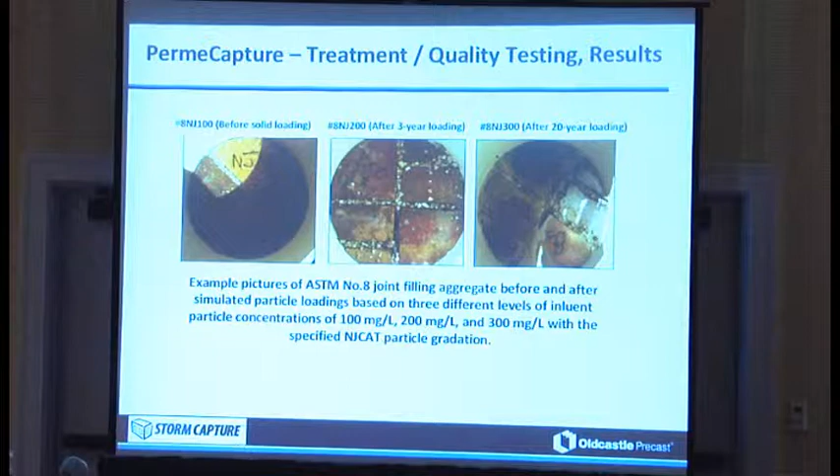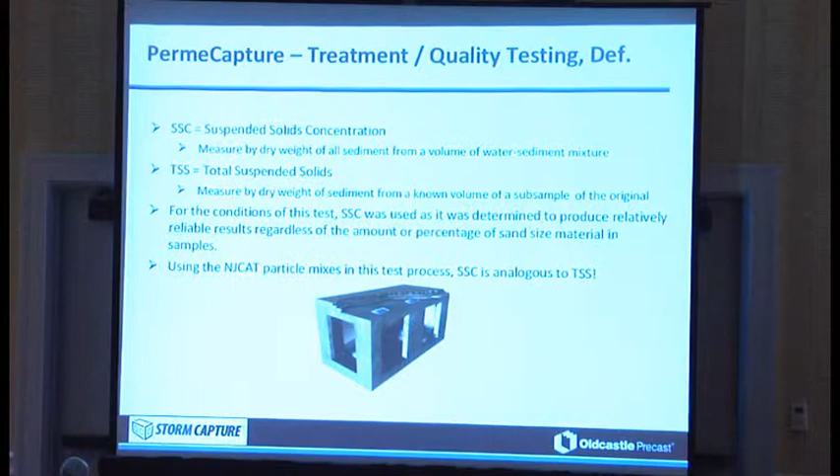So what we're looking at here are some processes. We looked at the suspended solids concentration versus total suspended solids concentration, and they're close enough using NJCAT particle mixes that they're considered to be the same.

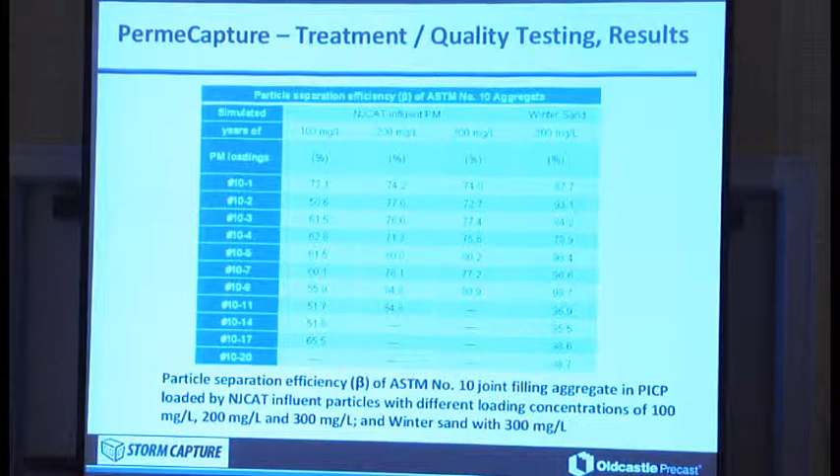What we found through this testing process - we also looked at winter sand using Ontario DOT criteria - essentially, the larger the aggregates, meaning number 8s, which would be like a 3/8 top size with majority no fines, all washed material, versus number 10s, which would be a 1/4 inch top size with a higher concentration of 1/8 inch aggregates, you get a higher percent of removal when you have smaller chips.

So what will happen is, if you want a higher sedimentation removal rate, you'll actually need to clean it more frequently, because the number 10s clogged in about a 9-year simulated period rather than 20 years. The number 8s allowed enough particulates and fines to pass through that it never really clogged up in the 20-year period, which is pretty much true to what we're finding in the field with our installations.

So we're talking about these total suspended solids. The manufacturers need to guide you as designers as to what products need to be used in their joints, depending on your site, your requirements for that site, or your municipality's requirements.

So typically what we want to look at is, now that we know what the suspended solids is, what do we look at for the water quality process? We looked, like I said earlier, at the NJCAT and Ontario DOT material gradations for TSS removal rate.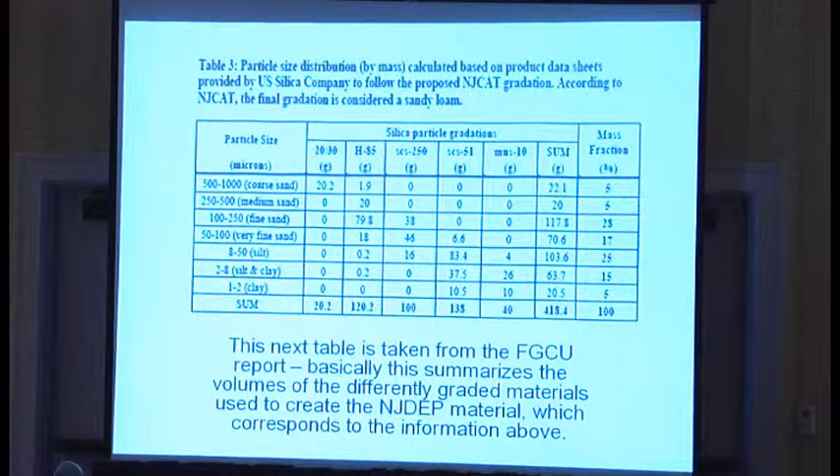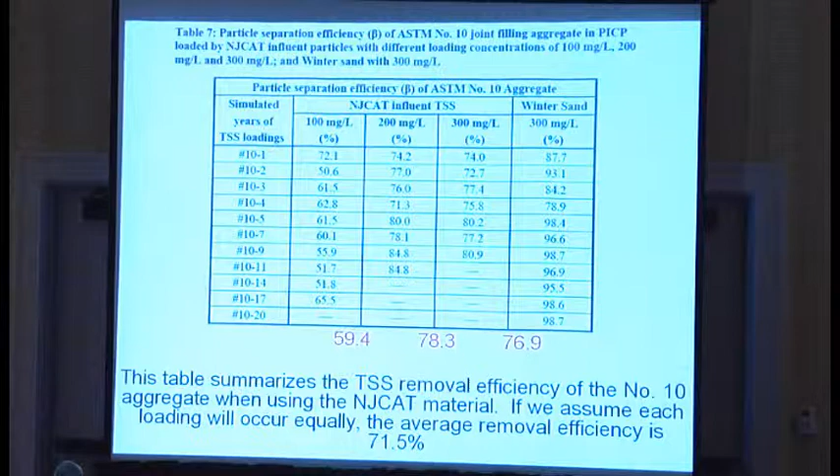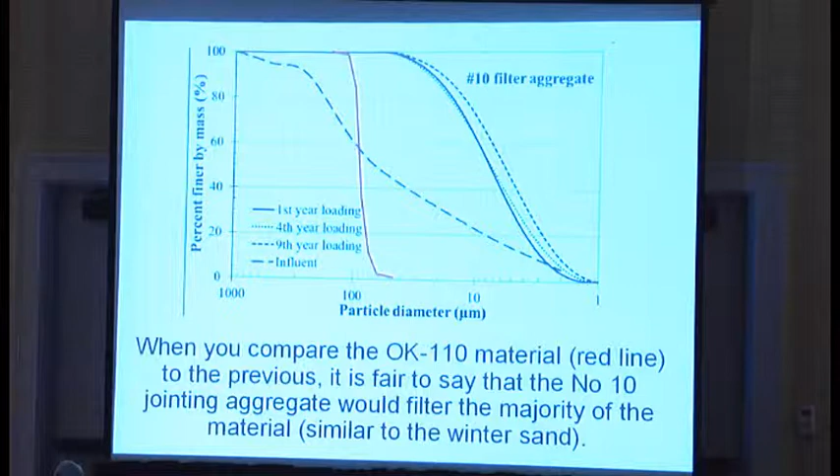We won't bog you down with these numbers because my eyes blur over, but essentially we're looking at 60 to 75% TSS removal rate for either material. And if we look at particle diameters less than 50 microns in terms of stopping those larger particles, we find that both materials are about the same.

So essentially what we end up saying is that we get a 70% removal efficiency for New Jersey material, or 100% removal efficiency for Ontario material.

So here, I think the question came up - we have winter sand, how is that going to be impacted? Well, based on the workshop study we did at Lisle, for Morton Arboretum in Chicago, after about a 9-year period of time, we actually did a workshop that looked at what happens to the particulates and fines as it migrates down through these joints.

Where is it going? Because the DuPage County officials said, well, we think that all those particulates go to the bottom of the aggregates and you lose your void storage, so you can't store as much water - much like sedimentation in wet detention ponds or retention ponds. You lose your volume storage over time, and then you have to dredge it back out because it no longer meets the capacity requirements with time.

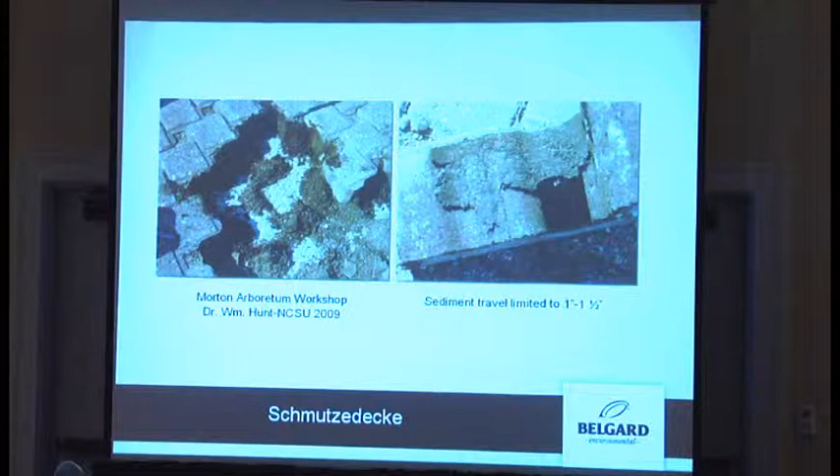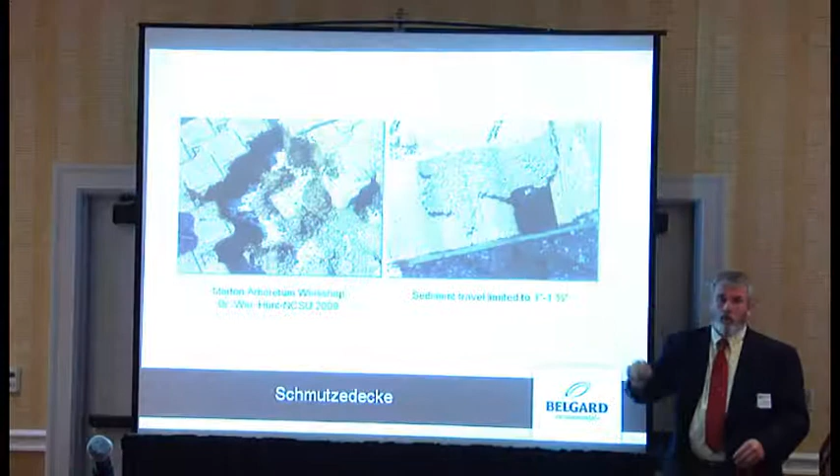So what we'd suggest is that your concerns over the percent of TSS removal rate aren't as critical, because the sediment only travels about 1 to 1.5 inches, as shown here with removal of the pavers. Below that area, there aren't any more sediment particles traveling. You see the white aggregates in the first picture - that's your setting bed material. We looked at the particulates and fines, and they never moved into that area. What's really moving into the area below the pavement is microscopic pollutants - phosphorus, nitrates, and hydrocarbons.

There are naturally occurring enzymes on the aggregates that establish a bacteria colony which break down these pollutants over time. But the problem with flexible pavement construction is you don't want the time of concentration to exceed this 24 to 48 hour period.

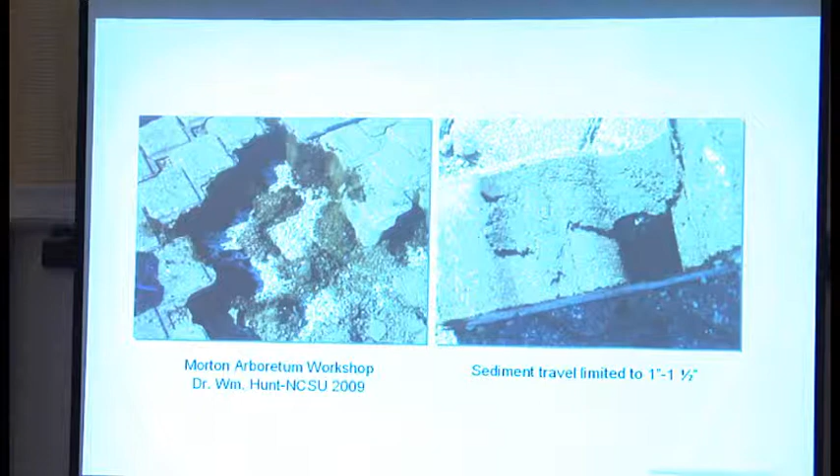So what we're thinking is possible is underground tank construction, where we'd capture the water 100%, because the C value for this system is zero until you exceed the capacity to store the water. Then the water would be stored and treated on demand as it's discharged, either to a daylight or a storm sewer. You could mitigate peak flows with a control mechanism so your discharge flow rate doesn't exceed your hydromodification requirements, as you call it out here - we just call it 'don't let it go too fast' in the Midwest. Or you can capture this water and use it for water harvesting.

We're currently doing additional research where we're going to take particles of glass and put these in the joint materials to help improve the water, because all we need is water contact flow-through, and it removes your nutrients, pesticides, and chlorinated solvents. It's been approved by the EPA in Ohio, Kentucky, and Indiana.

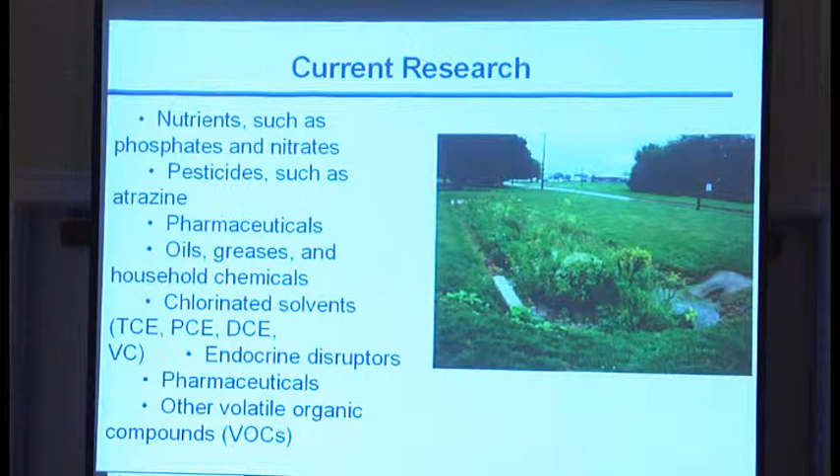Which I really know sets you guys in California off - I mean, you guys got the CBR value and you don't even use it, the California bearing ratio? Come on. But nonetheless, we're going to have to come out here to California and show you that this stuff works, because I know you're all from Missouri. Well, that's how it works wherever I go.

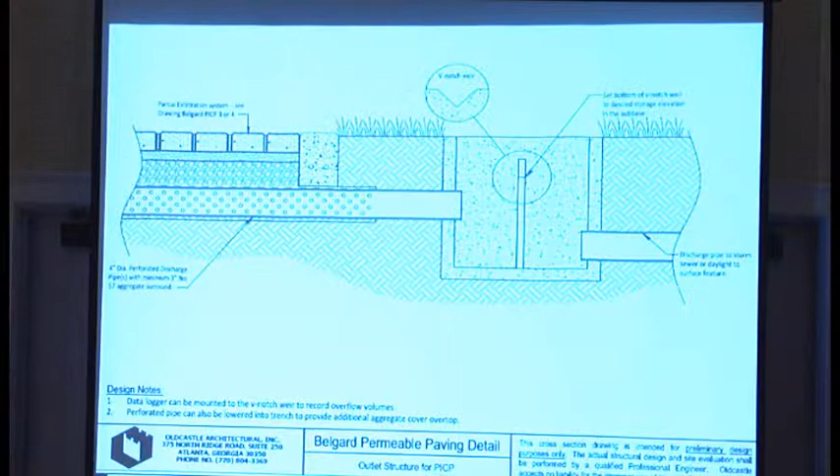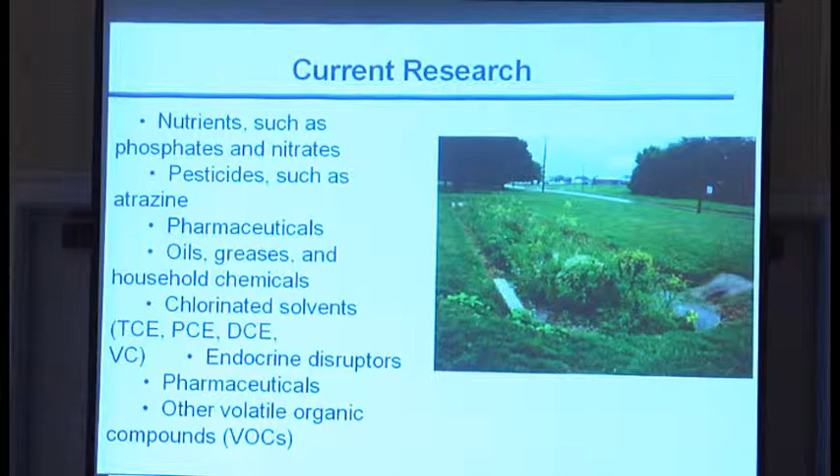But anyway, what we're looking at here is the runoff running through a bioswale with a soil mix containing these powders, and we're actually working now to incorporate those into the joint aggregates.

The other process would be taking concrete tanks to capture the water, possibly since you have a lot of sites here with expansive clay soils, so it'd be a lined system. You'd run them into a discharge point, build an outlet structure, then have bags of material that would go into this tank, with a weir built so the water passes through it, and you could immediately discharge it back into your streams.

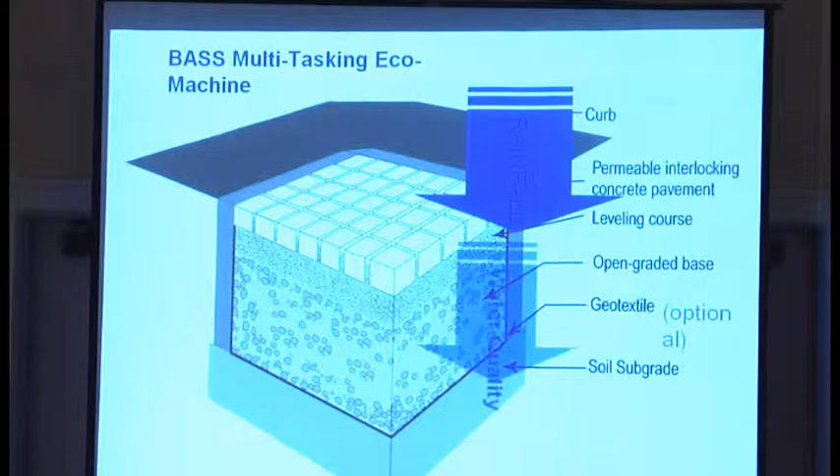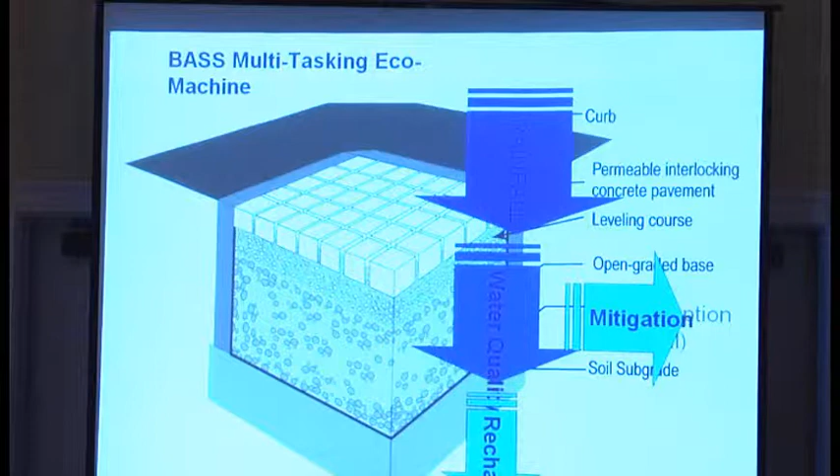So, with that being said, what we'd like you to consider is that when you have rainfall, we want to improve water quality. One of the things we'd like to do is mitigate peak flows so we reduce scouring to downstream rivers and streams, and promote the ability to recharge groundwater where possible.

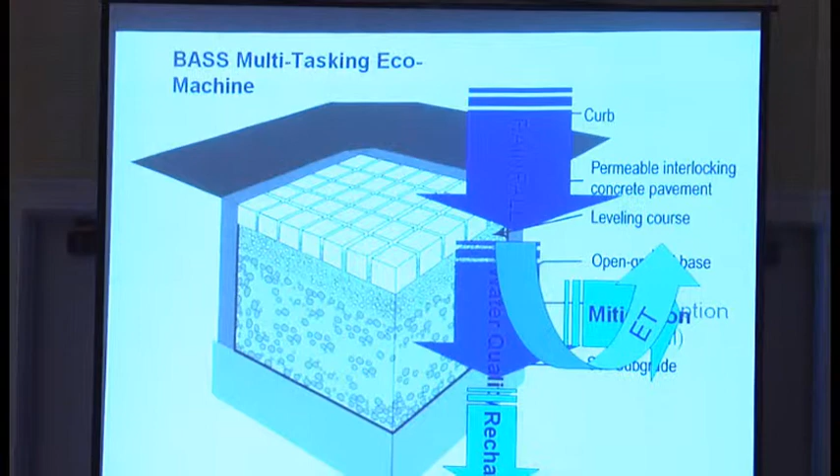We actually have a cooling effect - we can reduce thermal pollution by evapotranspiration of water on the aggregates. We can also use photocatalytic cement with nanotechnology, making pavers with cement activated by sunlight, which improves air quality by 50%.

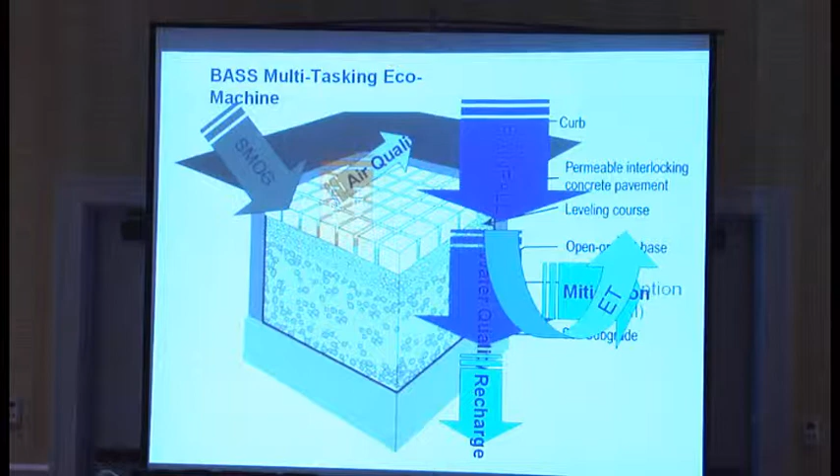We can use light-colored pavers that impact LEED projects, as part of a 26-point credit system that pavers bring to LEED projects for USGBC. We have the ability to use light-colored pavers that meet the SRI value, and we also have the ability to harvest and capture this water.

So, I think somebody mentioned being a decider - we had a president, but you're the deciders. You decide whether you want to use this. You have the ability to make the difference. My job is done.

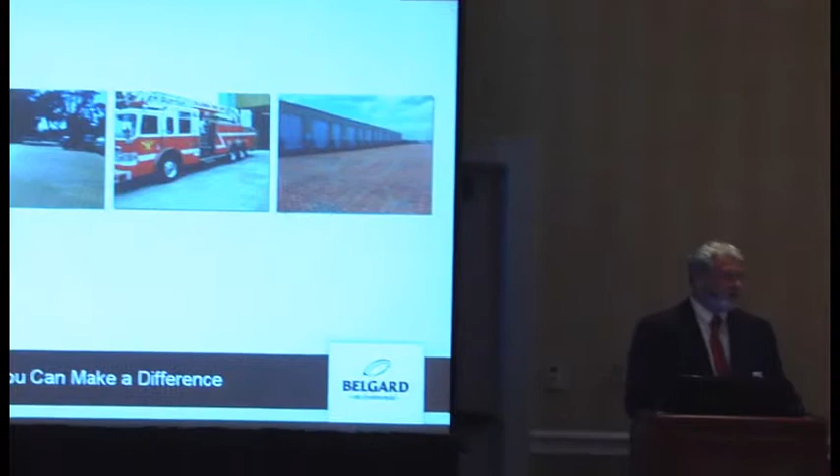So are there any questions we can answer? Thank you.